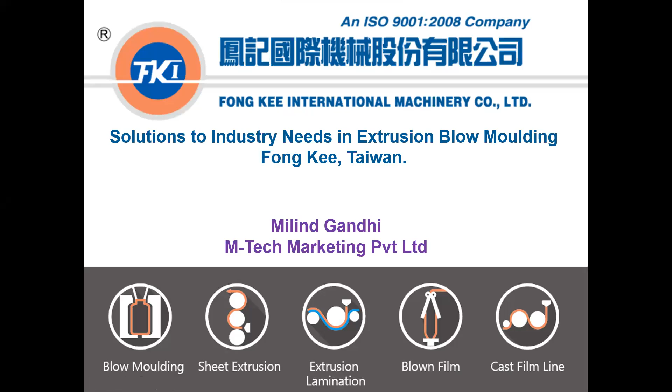I've been associated with them since 2012, bringing in their technology. For the benefit of people who may not be so well conversant with Fong Kee, I would quickly run through to get an idea about what Fong Kee is offering, and then we'll go to the topics.

Mr. Milind, you can also switch on your video so that your face will be visible for the audience also. Is that okay now? Are you able to see now? Not yet, not yet, one second. You cannot start your video because the host... Okay. Yeah, perfect, okay.

So as I said, Fong Kee is one of the leading extrusion machinery manufacturers from Southeast Asia. They have been into this business for almost 6 decades, almost a 60-year-old company.

They are based out of Tainan in Taiwan, which is the southern part of Taiwan. Since 1953, they are into this. It's a family-owned company, third generation into this business, employing about 200 people, with an average age of around 42 years.

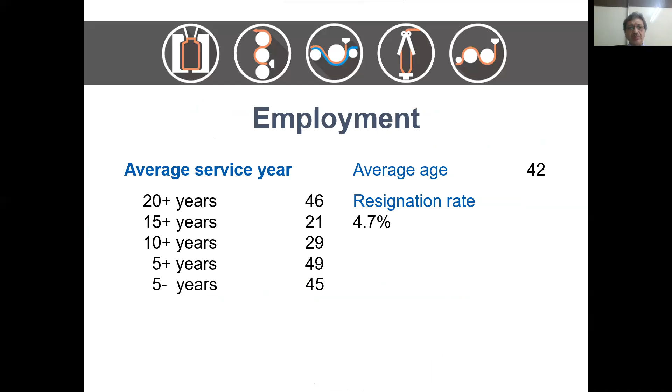We have sales across the globe and are one of the leading extrusion machinery suppliers. 80% of the business comes from repeat business, with sales offices across the globe, including India, Fong Kee India.

Primarily, it has been an extrusion machinery builder covering everything under extrusion, but over a period of time they have consolidated themselves, offering blown film line, blow molding machines, sheet extrusion, cast film line, and extrusion lamination machines. On average, the company's turnover has been about 30 million USD.

So we have primarily the HBA, HBB, EHB, and ABI. These are the major products, which is the blow molding products that contribute to a major share of our company's sales.

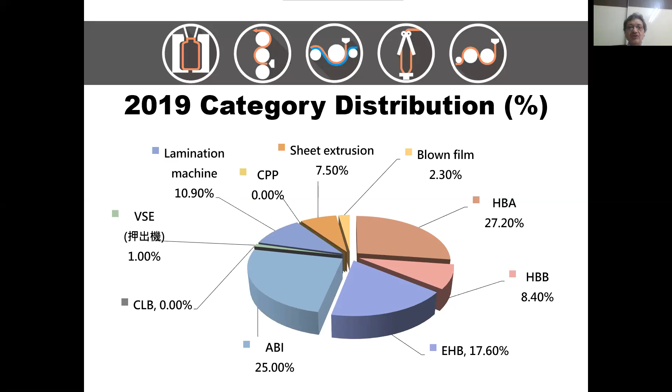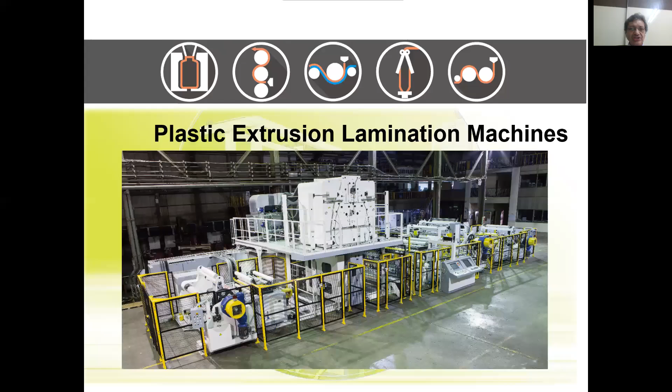Just to get an overview, we have complete extrusion lines for different specifications, outlooks, and material handling. We have a very strong base here in India, more than 40 machines of extrusion lamination, especially in the packaging industry. We also offer blown film lines, a complete range right up to 8 meters wide, up to 1 ton's capacity.

We have a blow molding range, a very wide range, right from 50 ml up to 1,000 liters. The product line is divided basically into different product applications based on the end use applications and capacities.

So we have the HBA series, which is typically for up to 30 liters, which is a direct extrusion. It could be monolayer, or co-extrusion, mono and multi-layer.

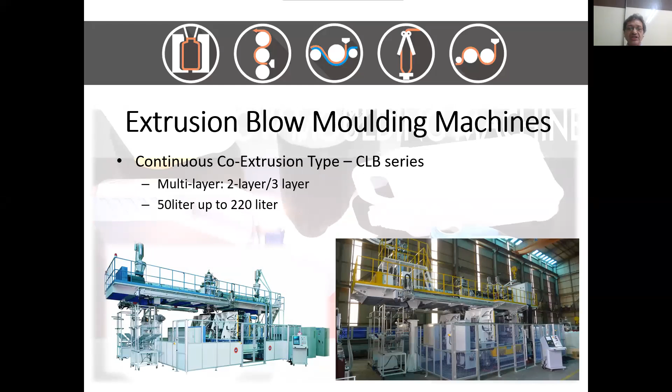Then you have the continuous co-extrusion, which Raghu has already highlighted. It's basically the new trend today in extrusion for larger containers especially, which used to be an accumulator-based design earlier. So that's similar to what we have here.

As far as continuous extrusion, you have the accumulator head designs also, which is going for a lot of other applications, automotive as well. So you have the accumulator-based designs. You have PC polycarbonate containers.

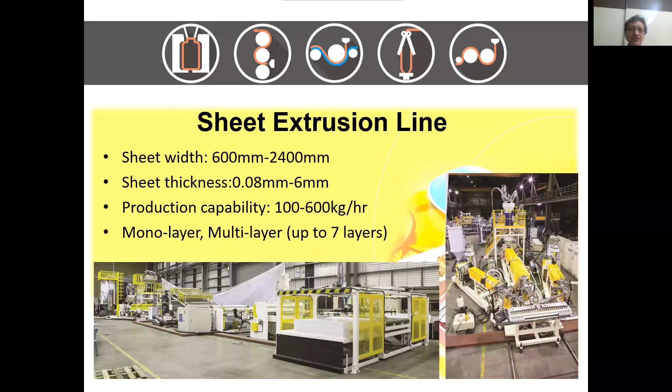So this is as far as blow molding is concerned, the sheet line for various applications, for disposable application, as well as for white goods industries, luggage industry, stationery applications.

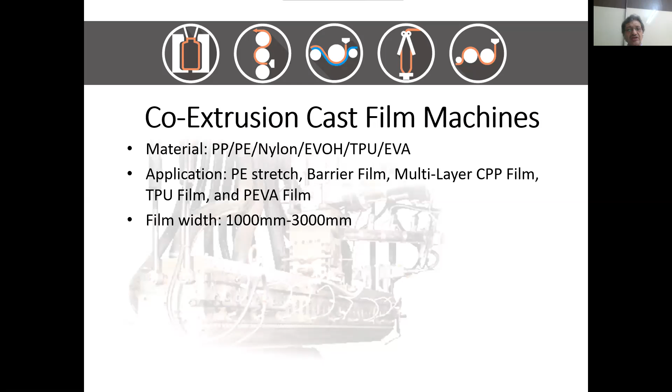So these are the other product lines. You have the cast film line, which is for the flexible packaging industry by and large, which goes as one of the layers, as a sealant layer or as a packaging layer.

The main reason for our success and being in this market for so long is we keep continuously innovating, with a competitive price to output ratio in terms of investment, and excellent service support. We have service support here in India as well, and a good support team in all respects for sales and development.

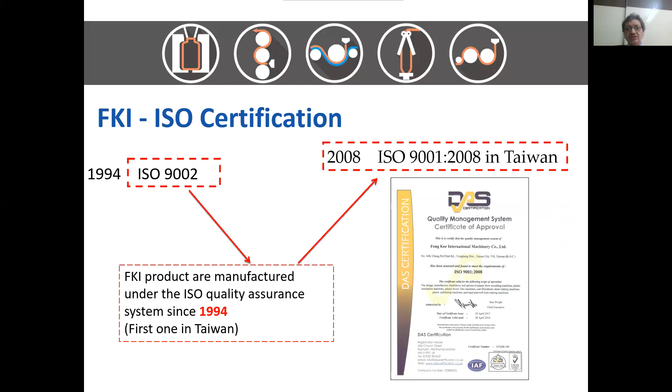So that's primarily as far as the company is concerned, it's ISO certified, CE certifications. We work together with the customer and help in cost reduction, energy saving, and I'll come to more details as we go further into this.

Coming to blow molding, yes, this is a complete range that we offer. As I mentioned earlier, this is one of the product lines. Primarily as blow molding, but what is the demand today from the market? What is the market looking for as a solution from the industry?

You want basically low maintenance, low power consumption, cost efficiency, less noise, less labor, environmental friendly, high productivity, no pollution. Today, less labor is becoming more and more important, and the energy savings. How these are being addressed in various models, I'll try to touch upon that.

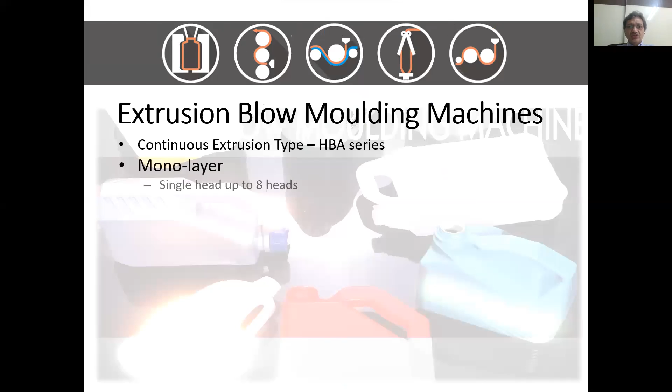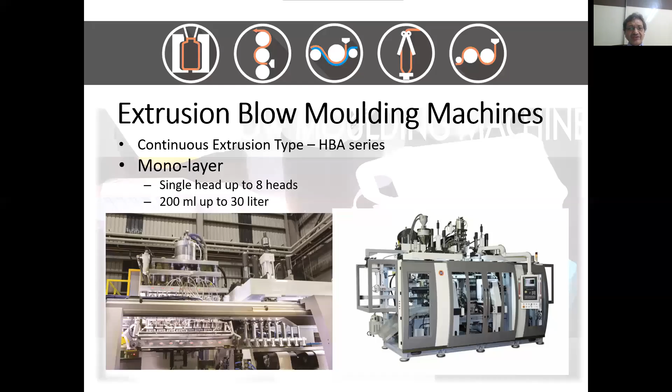These are the areas we have highlighted. So here you have the range which offers complete, from 200 ml right up to 30 liters, primarily for high output monolayer or co-extrusion. So it could be 2-layer, 5 layers, 7 layers, could be multi-head, multi-station. Depending on the productivity required, this could be a solution to it.

You have blow molding, which are accumulator based design. Basically where the shot weights are quite bigger, so the Parison extrusion time is longer. In such cases, you have the accumulator so that you push out the Parison in a short time. So you have various of these applications.

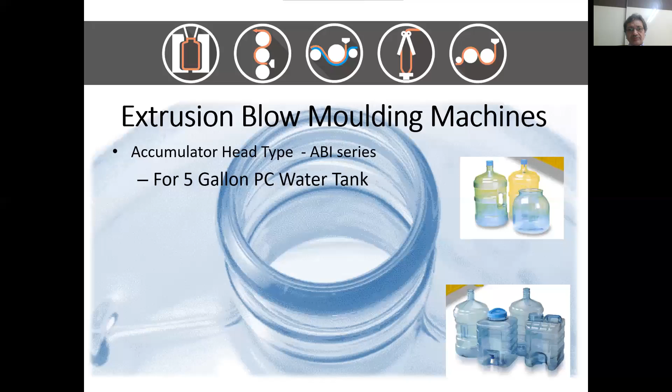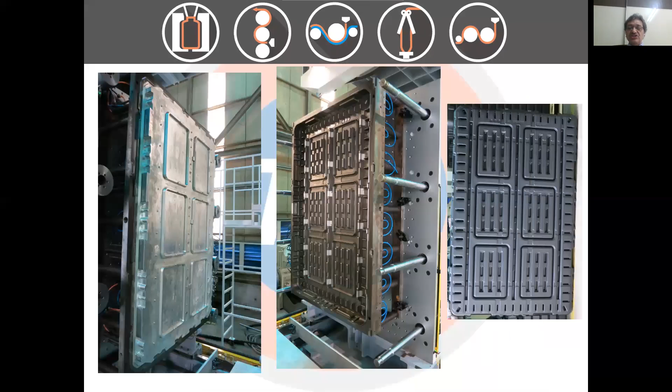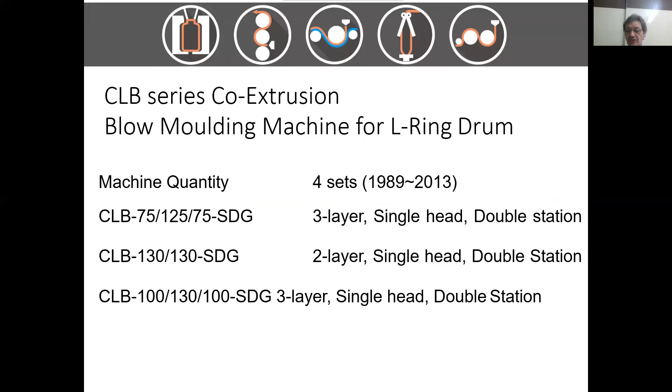Then you have some automotive components, some high pressure vessels, drums, different types of drums you have. You have liners, and here, as Rajesh already pointed out, the trend is towards going towards continuous extrusion blow molding. So that's another solution.

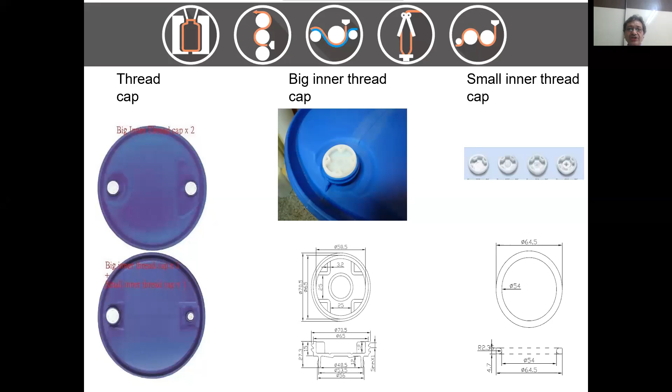You have the post-cooling devices to, as rightly Rajesh pointed out, bring up the productivity of the machine. You have different requirements on the product to be fulfilled so that you have minimum post-operation. You want to have all these incorporated in your process of manufacturing itself, so that there's least post-operation time and the product is more or less ready to dispatch to the customer.

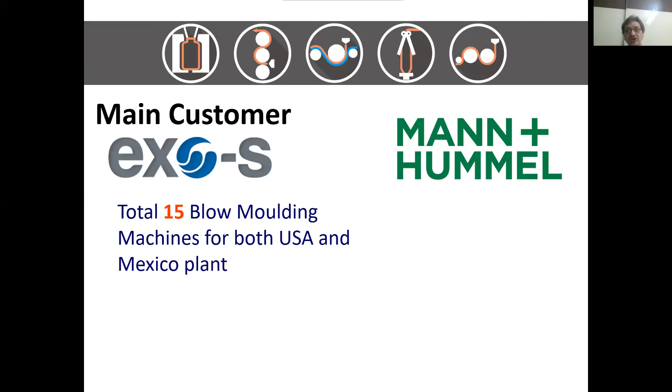Similarly, you have the accumulator design also for the automotive industry. The air ducts and the components are very important, and some of the customers who are leading in this market are using the technology from Fong and have multiple installations at multiple locations, and you have such intricate components being made. That's the beauty of the extrusion blow molding technology.

Various intricate shapes and containers or products, basically various types of ducts. One point, yes, definitely the air ducts business - irrespective whether the vehicle moves to, trend is of course going to be more towards e-vehicles, but nonetheless for the air circulation, air conditioning, these duct businesses would definitely remain. So this part of the business is quite important.

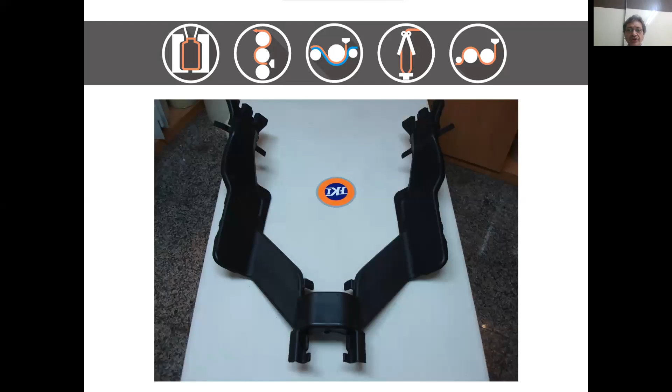The spoilers and the side plates, some of the tanks, commercial vehicles - these are some industrial floats.

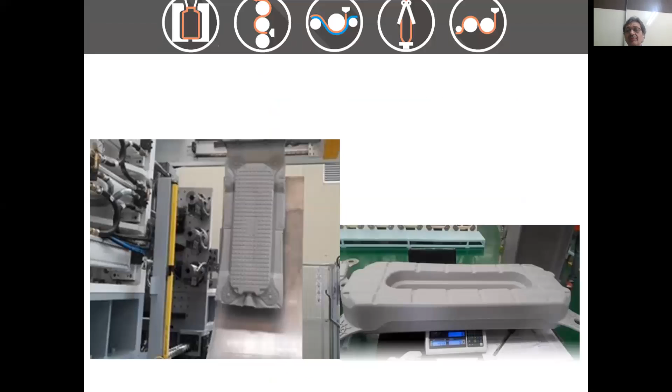So what is basically the requirement for these kind of products? You need basically a hydraulic power pack when it is an accumulator based design. You have accumulators of different capacities based on the article shot weights.

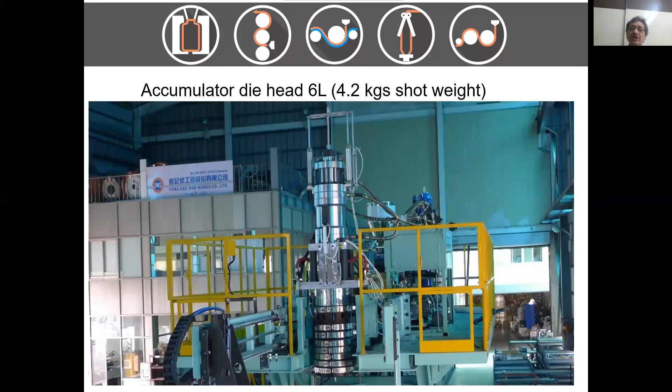You need more space for loading such components because they are much more bigger in terms of dimensions. Shot weight may not be so big, but the important thing is the dimensions of the product being much bigger, so you need much bigger platen size. Also, secondly, tie barless design so that you can easily load the molds and take out the molds. You need good power pack units so that you can achieve the faster cycle time and the locking time.

The robotic system, as I mentioned, the requirement is to have less dependency on labor. So you want to have automatic handling system to take out the devices.

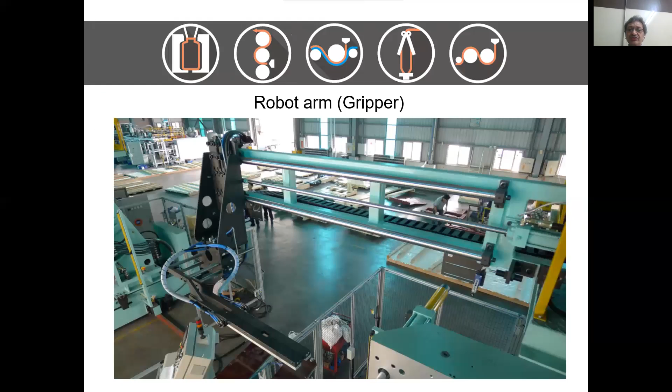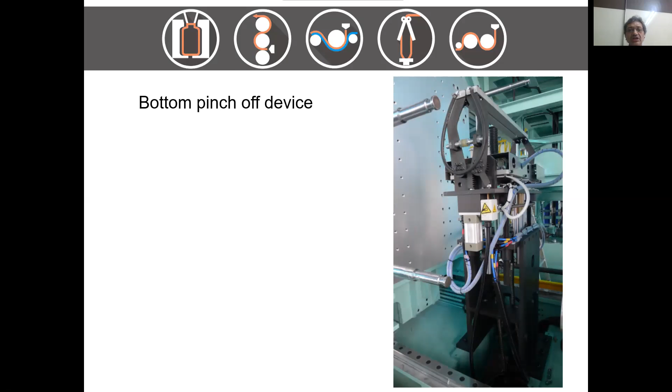You have certain products which may need different types of blowing arrangement, need not necessarily be always from a top blowing. There could be a side blowing, could be a middle blowing, could be a bottom blowing. So you have different blowing systems, and you also need deflashing system online so that you can basically have minimum operations on the equipment, and the product can be delivered directly to the customer.

Now, most important here is the machine also needs to be versatile in terms of handling the polymers, because there are different ranges and applications depending on the end use application. The material characteristics are required, so flexibility in terms of handling the polymers.

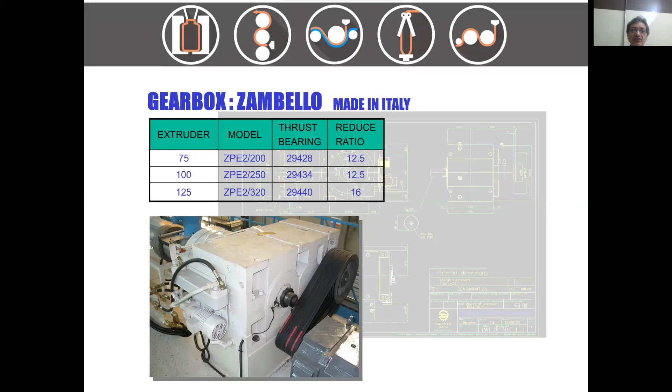You need a robust gearbox, so we have aligned with reliable suppliers as far as the supplies of components are concerned. You need good feeding system, continuous dosing systems, so you have groove feed sections. It's a barrier screw design.

The idea of having a barrier screw design is basically to ensure three things. Basically, you need to have a homogeneous mix. Secondly, you are often using different polymers, or you're using master batches. Some master batches may have a different melting point as compared to the base polymer. Therefore, sometimes there is a tendency that the material may not completely melt, and these particles may come along with the polymer unmelted, and you find a concentrated or specks which is coming here, as you can see, unmelted particles.

Now, with the designs of the barrier screw, what happens is - this is the flow of direction from left to right - so the material, as it goes further in and progresses melting, you have in the compression area the double flights which is created.

The meaning is that as the polymer melts, as it progresses down, the liquid portion is separated from the solid. You can see here there is a double flight, one marked with diagonal lines, which will be slightly smaller in diameter. So the liquid will overflow and go into the separate channel. As you go down, this portion will increase and the solid will remain unmelted separately, so two compartments are created as you progress.

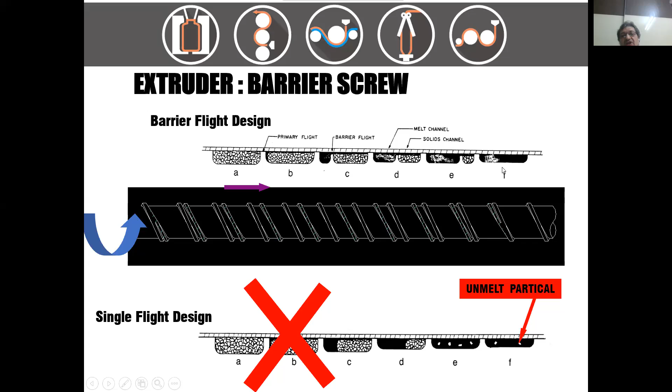So you are ensuring the material is thoroughly mixed and homogeneous, at least at this stage. The next stage is where you have the mixing head at the end, ensuring the material is thoroughly mixed in terms of the master batch you are using, or sometimes a regrind. The mixing is happening, uniform temperature is achieved, and then you push it further down the system, ensuring good mixing and a homogeneous melt, with no unplasticized material being pushed through.

Of course, the other important aspect is the parison programming, which is important for having a uniform distribution - I'll come to this in more detail subsequently - basically to control the wall thickness of the container so that you get ultimately a uniform wall thickness.

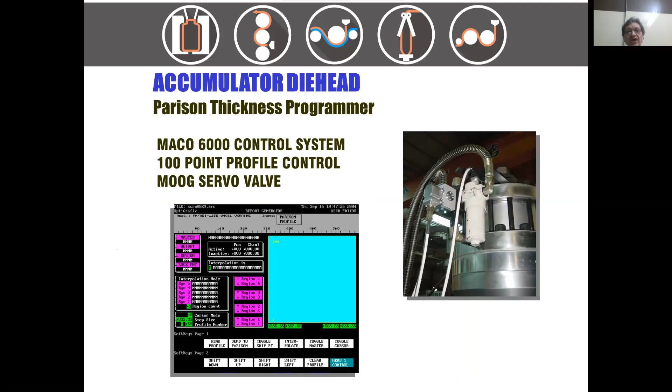You have this both along the length and along the diameter of the parison - or along the length of the tube - where you want to vary the wall thickness so that you get ultimately a uniform wall thickness article.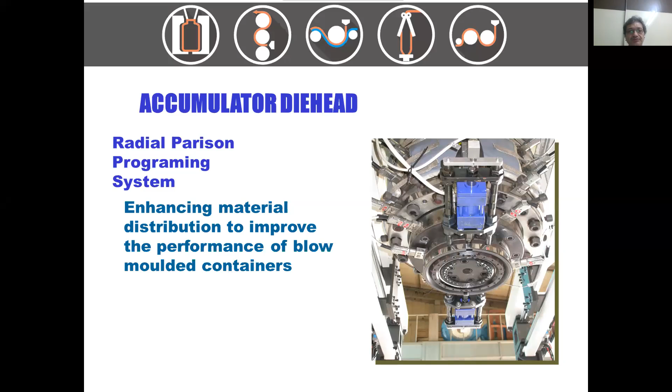So you need a post handling system, a robotic system. The clamping system - we have different systems based on the article size and platen sizes. You need a robust, very good clamping achieved on the article, especially with long articles, to have uniform distribution of the locking force so that the mold does not open out and you don't get burr or marks on the parting lines.

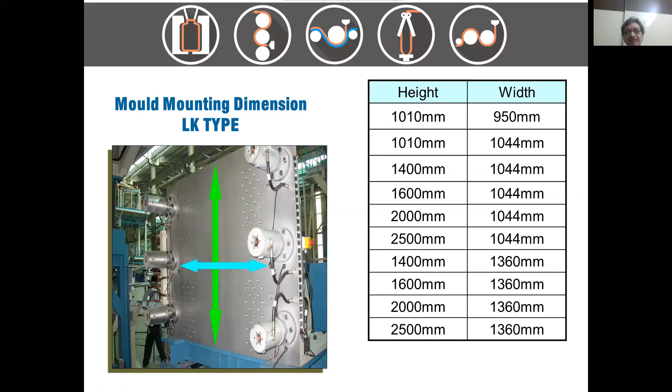This is the additional locking device provided so that when you have long articles - though the shot weight may not be very high, but because the article is bigger and has a bigger surface area - you need additional forces to make sure the articles don't open out.

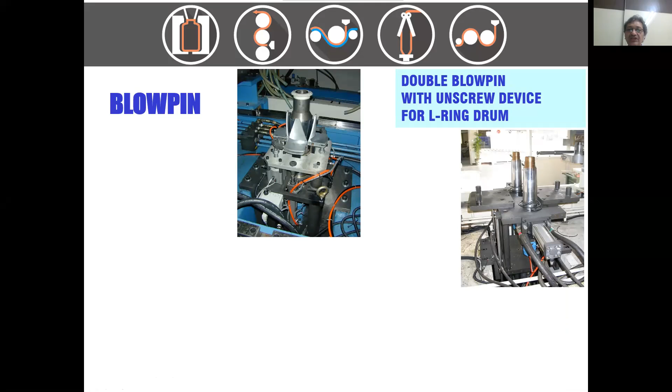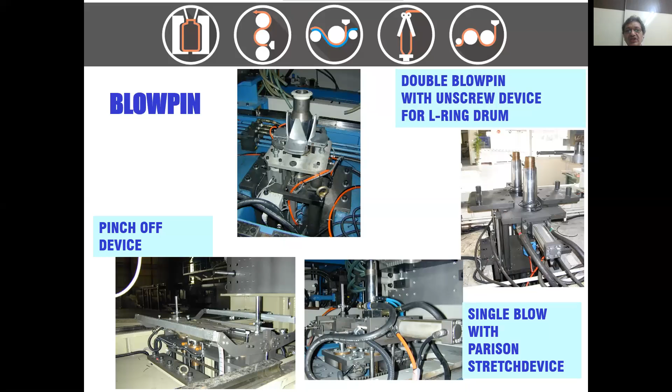Also, you need different types of blowing arrangements. As I mentioned, sometimes you need unscrewing - like for example, typically in L-ring drums, where you have a neck with a screwing arrangement, so you need blowing as well as screwing and unscrewing devices. You have a pinch-off device, and a parison stretching device - sometimes you need to even stretch the parison so it stretches along the width of the article.

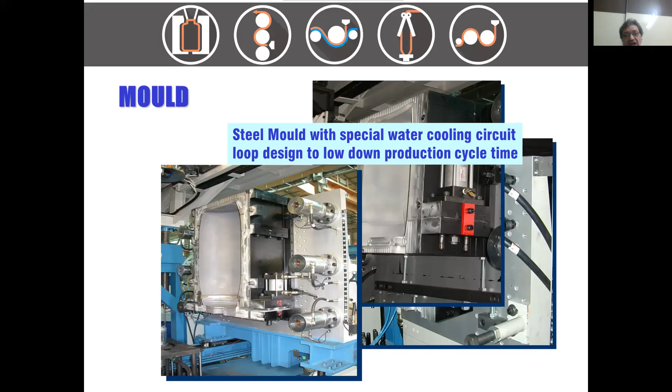You have various sub-suppliers to ensure reliability and consistency of the equipment, so you get more reliable, consistent equipment. Molds play a very important role in terms of productivity, so an efficient cooling system is important in the design of the mold, as well as water circulation - and we have our own mold maker with whom we cooperate.

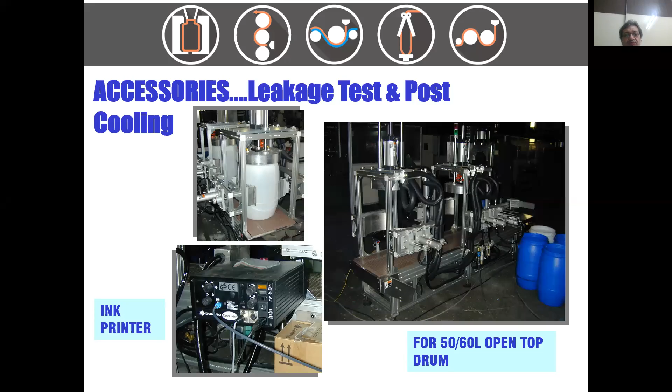You have accessories like post-cooling device, pneumatic device or handling system, post-threading or trimming system, leak tester, inline inkjet printers, stacking leak testers, and inline crushers and grinders, so that the whole system can be integrated and production can be more or less scrap-free.

We have wide-ranging references across the industry.

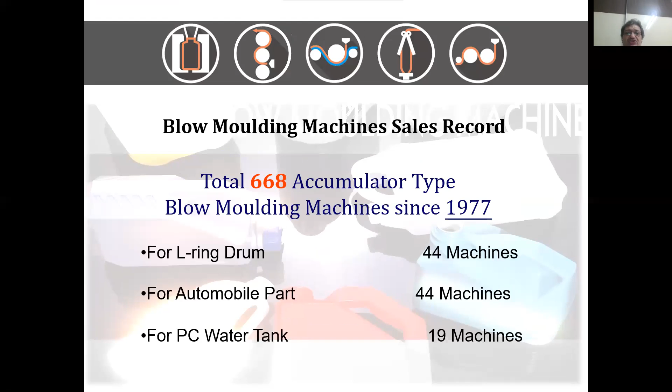The next important development, and which rightly today is the trend towards electric machines. Just as you are all familiar with injection molding, so also the trend is in blow molding. The reasons are primarily to save energy cost, clean room, and less maintenance, especially with the hydraulics.

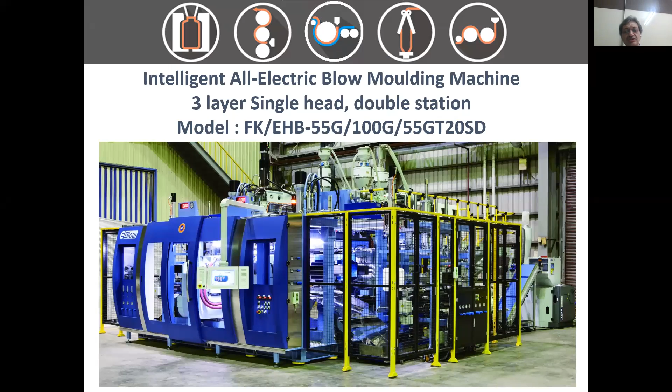This is typically a layout of one of the electric blow molding machines with a 3-layer design with a double station. You can see here different layouts, just to give you an idea.

So of course, once again touching upon those points, the electric machine is another solution to the market, primarily.

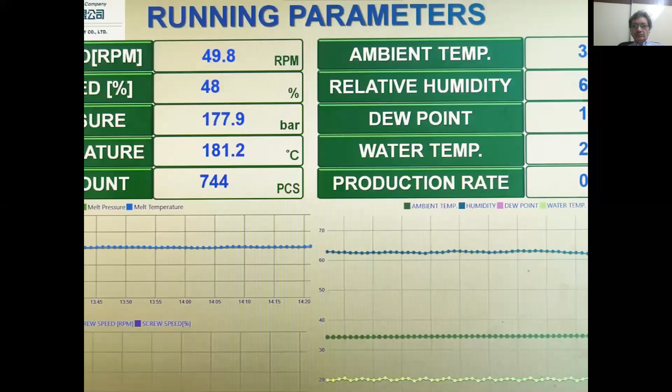So this gives you briefly an idea of how the full electric machine works. This is the layout. It's compact, more or less everything closed loop, no manual interference, with minimum recycling, and whatever scrap or pinch off is generated is recirculated into the system.

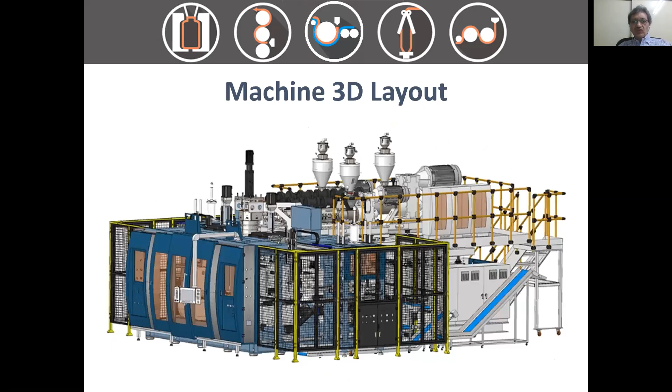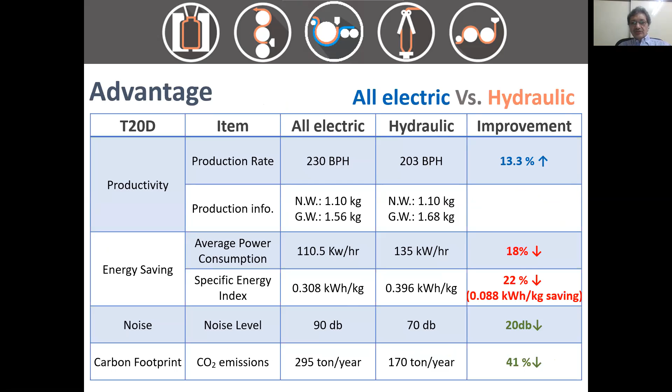So basically, our main idea is to save. One of the main reasons is for saving power vis-a-vis the hydraulic machine. So that's one idea, and it definitely reduces the carbon footprint. Noise levels are reduced, so that's one major saving in terms of the full electric machine.

So also the co-extrusion, which my former speaker has already highlighted in terms of cost savings, is another aspect.

This is a typical specification of the line. In fact, this machine was running during the last K show with 257 bottles or containers per hour.

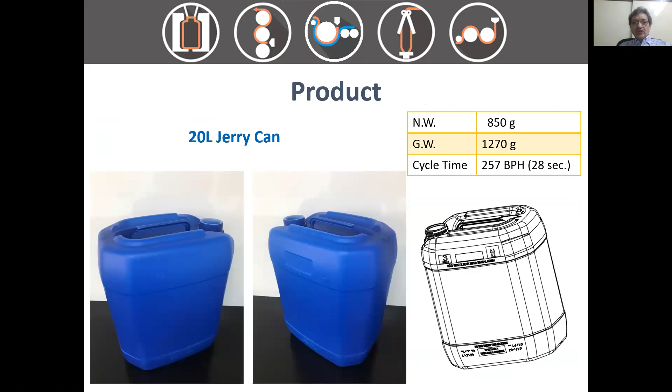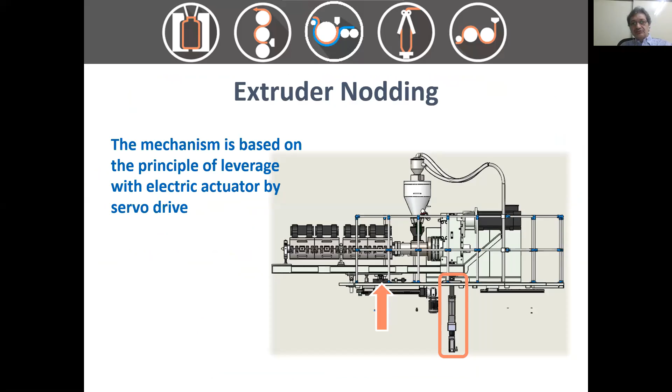Extruder nodding, which is again motorized controlled. You have the die head, which is again 100 point or 200 point depending on the article, with the parison programming, PWDS and SFDR.

This is basically to control the wall thickness, especially for the articles. This is, I'm coming subsequently in the further presentation, how exactly it helps.

This is a view of a clamping unit, which is on a linear bearing, so there is less movement, less vibration.

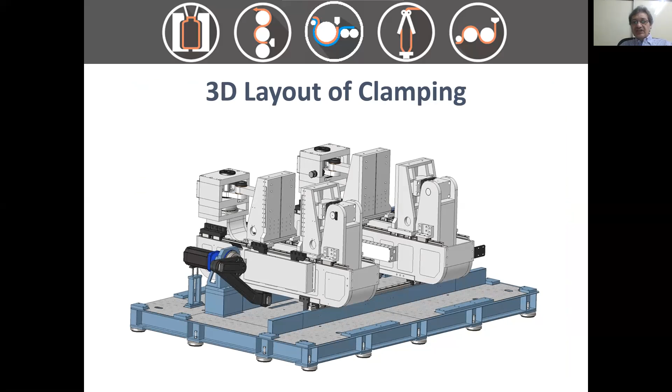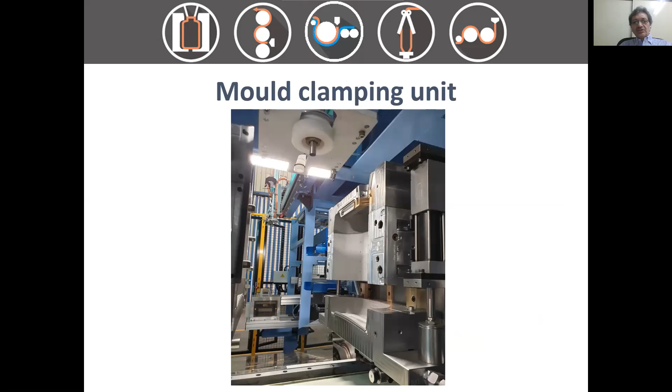This is a clamping unit. Very important is to make it lightweight so that the energy consumption is less.

At the same time, the structures need to be rigid to hold the pressures and ensure the longevity of the machine. So there's a reinforcement given to the platen so that it is lightweight as well as gives sufficient reinforcement and can take the loads, with sufficient space in terms of platen size so that more area is available for mounting the molds.

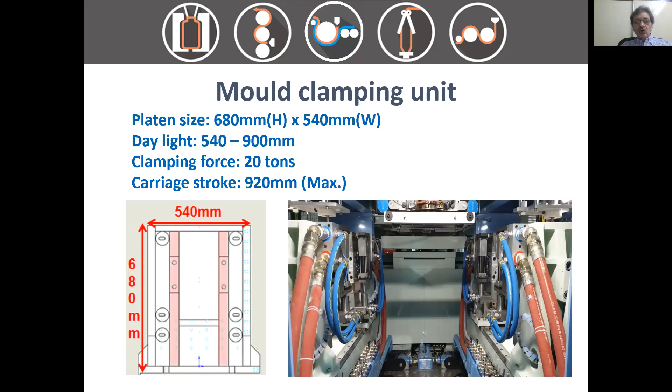We also work with mold makers from different suppliers, especially in terms of the metallurgy and also in terms of the cooling efficiency, the proximity of the cooling channels besides the metallurgy.

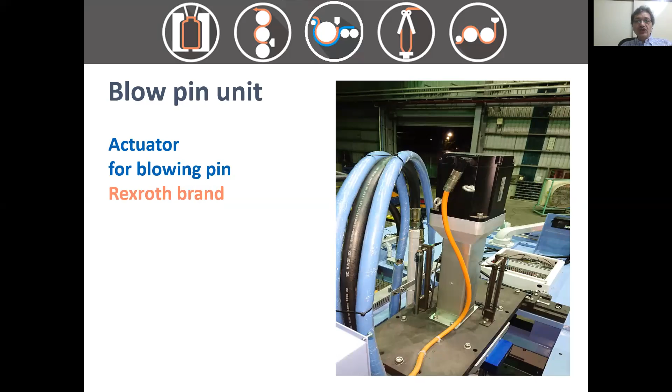Blowing pin, which is also controlled, because some processes need two-stage blowing or one stage, and secondly the circulation of air within the blow pin, because the polymer inside is hot and gives away a lot of heat. So the air coming in has to be circulated so that it brings higher efficiency in terms of cooling of the product before you can take it out.

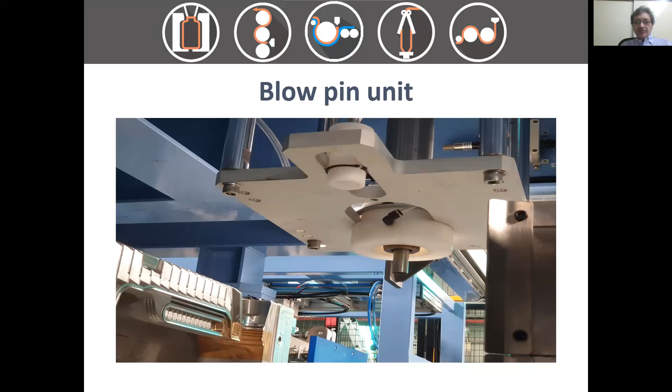So at least it has taken the firm shape. You have the deflashing unit, so you can remove the pinch offs, so no manual interference is required.

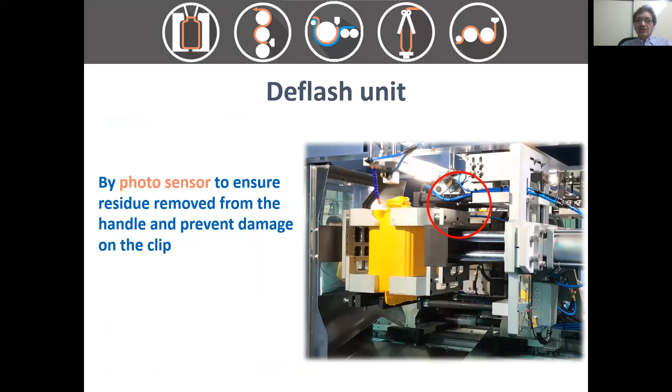You have the photo sensor which senses that the pinch off is taken out, there's no leftover. So it also gives the sensing, so there's no damage to the parts or the molds, and grippers for taking out the material or handling.

A weighing scale ensures that the weight of the article is within control, which indirectly reflects if there's any process variation also.

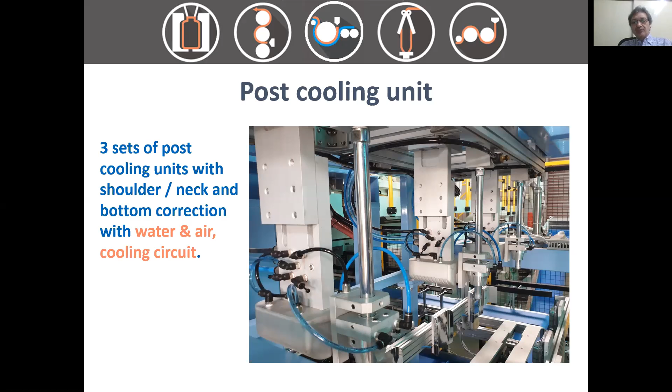Post cooling devices also help in accelerating the cooling, so you are reducing the time of the operation available on the machine and doing post cooling subsequently. Depending on the article, there could be 2 or 3 post cooling devices.

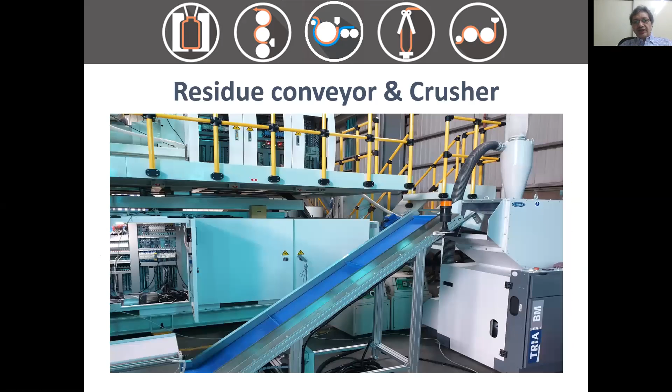You have leak tester, weighing scales, and the residue conveyor for carrying away the pinch off, the grinder, and the electrical cabinet, also tropicalized especially for a country like India.

There's enough safety in the equipment, also interlocks so that nobody can enter the production area while the machine is in operation, otherwise it will switch off. It's a CE certification with all the safety parameters, with all the safety grills around the machine.

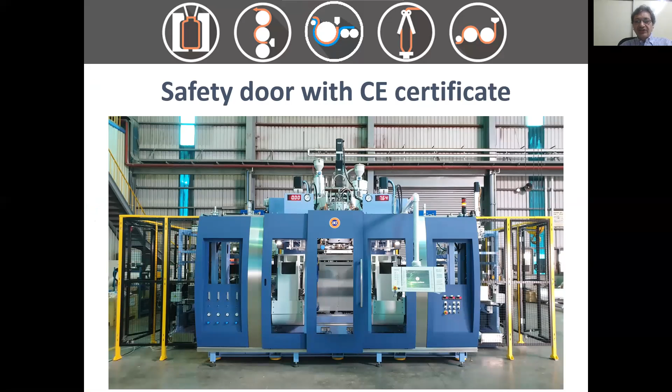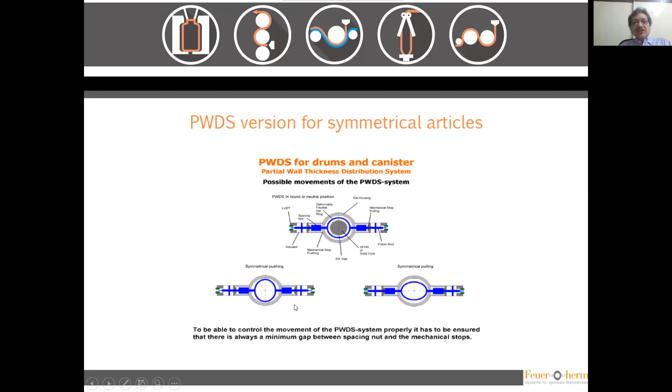As you can see here, the gap which you see is what is maintained with the help of this. You can see the gap is more uniform compared to here where you have more, less and more. This depends on the article shape, and you will see in the subsequent slide how it is being utilized.

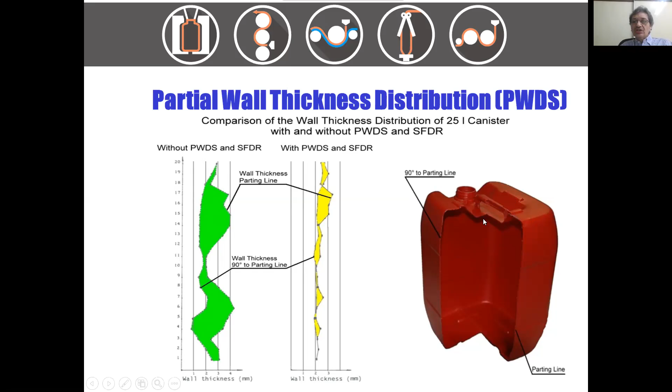And here you can see what I was trying to say: this distance is shortest, and when you go to the diagonal, which is further, the stretching is more. This can be controlled with the help of the PWDS and SFDR. This is just to give you an idea how it looks like without and with PWDS.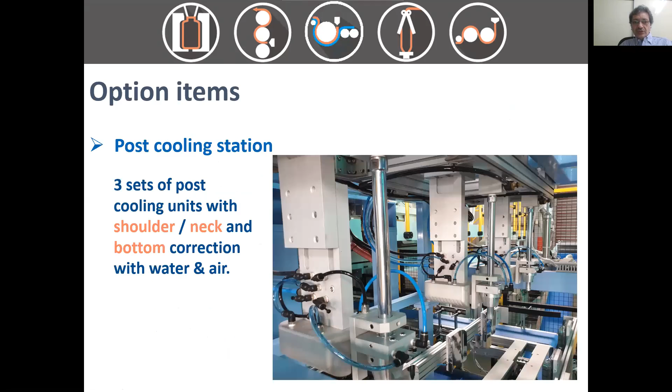The post cooling device, okay. Leak tester, I think we have touched upon earlier.

Also, the cooled air system, basically to control your blowing especially. You are circulating the air inside the container while it is being cooled in the mold before you can eject it out.

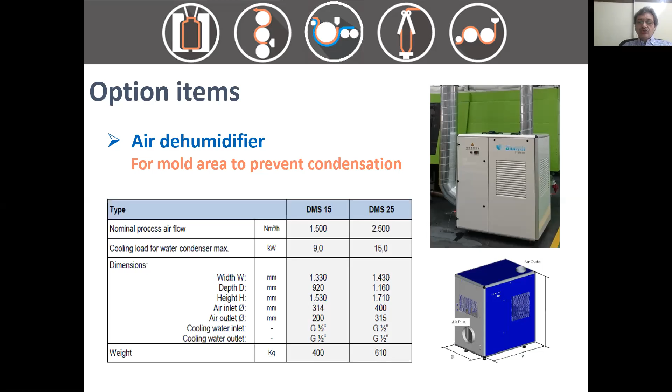Dehumidifier to ensure, especially in a country like India where humidity is quite high, especially on the coastal areas, and I would say more or less 50% of the country is on the coastal lines. So there, especially with humidity being very high, you have the sweating problem. So you have the dehumidifier, which ensures that at least in the cold mold area you have the dehumidified air so that the sweating issue is not there on the mold.

We also have the industry ready for Industry 4.0 with the SCADA system. So you have interfaces, easily accessible for the entire machine control from a single point, and the operator can control various points from a single control point.

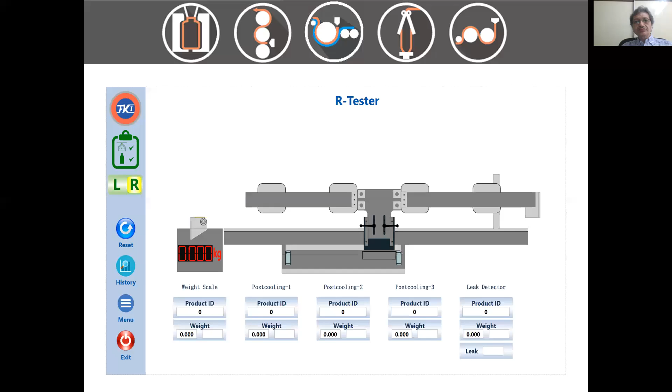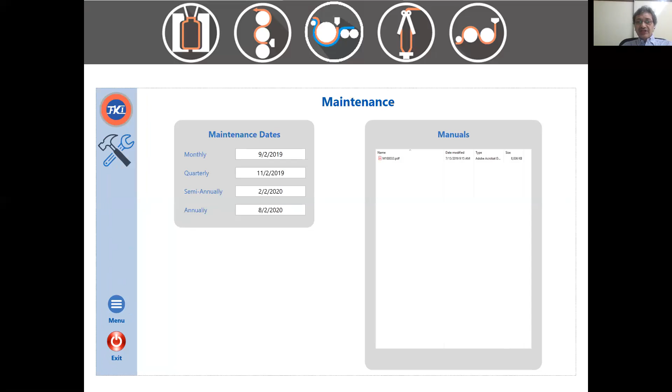Of course, there's an alarm history, so you have the historical data alarms also stored, so one knows what has happened in the night or what were the problems in the night shift. If the manager comes in the morning and wants to find out what was the problem and how long it took to rectify by the maintenance team, all that record data is available, the maintenance records, and it gives you prompts. Also it prompts when there is a requirement for maintenance. It also monitors in terms of power consumption and any unusual peaks which you see in your cycle trend, that gives you an indication that there's something wrong, so that corrective action can be taken.

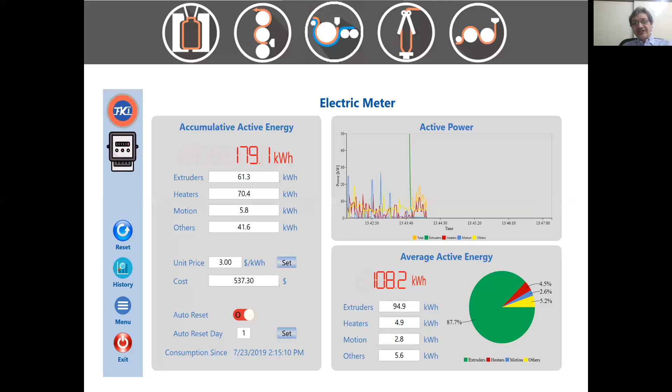Something preventive maintenance and helps the operations.

Automatic visual metrology, this is again another quality parameter. Basically it visually measures the wall thickness, and it tells you if there is a variation in the temperature or the profile of your parison programming. So then you immediately know that this would reflect on your product. Therefore it gives an alarm immediately, so that your production does not go waste and does not have a complaint from the customer.